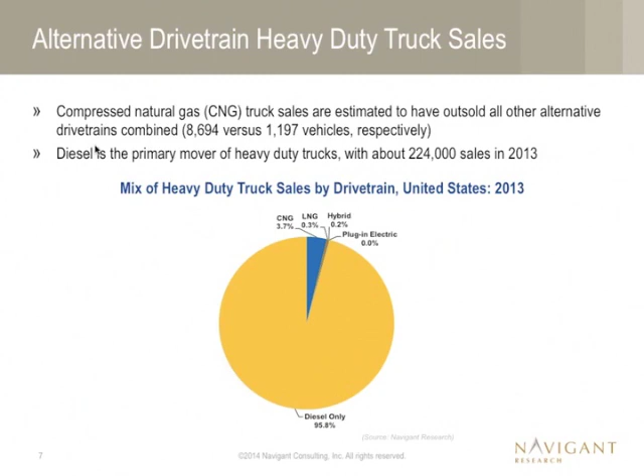But we are seeing a lot of movement within the alternative drivetrains as well. So as we look at where these trends are, we are seeing CNGs as being the big segment still. We're anticipating that's going to triple by 2022, growing to almost 27,000 annual sales in the heavy duty market. Liquefied natural gas, we hear a lot about that as well. There are some challenges within that market, but we are seeing strong growth. We're anticipating that to hit 7,163.

Hybrids and plug-in trucks are anticipated to grow rapidly, but they're still a very small part of the market. What we have seen in the last couple years is that natural gas has really stolen the thunder from the hybrid market. The hybrid market grew rapidly a couple years ago, and then it sort of stalled. We see that as still somewhat the case within heavy duty. Within heavy duty, things like compressed natural gas and liquid natural gas are really going to become more the mainstay. But that said, we are going to see a number of hybrids and plug-ins.

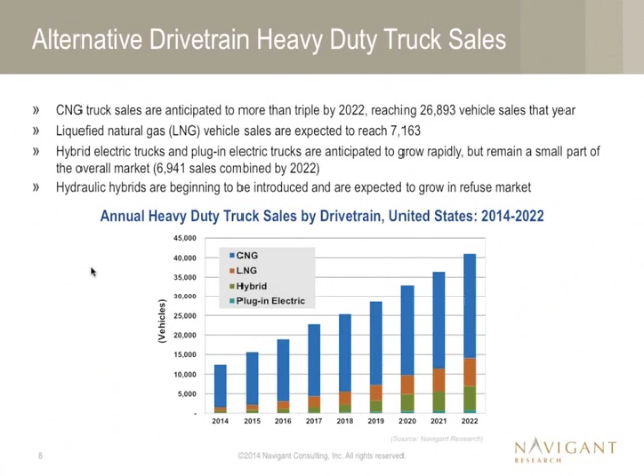Finally, what isn't actually in this chart is the hydraulic hybrids, and I wanted to mention that because we are seeing a lot of interest in the refuse market as well as the transit market. In the refuse market, we do see the hydraulic hybrids, and right now we see that about 17 hydraulic hybrids were added in 2013. Two of those were actually CNG and hydraulic hybrids. We're seeing a lot of interest in understanding how CNG can be combined with some of these other technologies, and it looks like hydraulic hybrid may be one of the areas that drives the combination of those technologies. So trying to understand why natural gas has taken the spotlight, one of the big issues really comes back to cost.

Now, CNG prices. There's a couple of things that make this a little bit complicated. First of all, as we're hearing right now, natural gas prices, the Henry Hub spot prices for natural gas, are actually very high. We have not seen that translated into the CNG price. One of the reasons for that is because natural gas does not make up the majority of the cost of CNG. The cost of CNG is being driven by electricity costs and taxes and profits, those sorts of things.

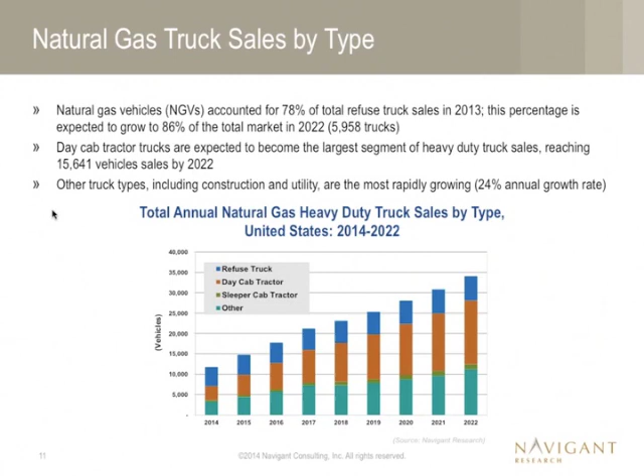So in terms of our forecast for natural gas, one of the key issues you have to look at is the infrastructure side of things. Within the refuse market, it really varies quite a bit whether it's a private station dedicated to that individual refuse fleet or if they're using public infrastructure. It can vary depending on the size of the market, the specific layout of the routes, and those sorts of things. So if there's a contract for a certain number of trucks to service a given city, the individual refuse companies are making the assessment of whether it's worthwhile to install a private refueling station. Some are using mobile refueling, or they end up using public refueling to serve that particular market.

So where does all this leave us? Right now we're seeing roughly 1,300, almost 1,400 stations, and we're anticipating that 1,325 more will be added by 2022. Really, the focus of this is going to be the early part of this forecast—through 2017 we see fairly strong growth within infrastructure development. That will start to slow when you get to 2018 and later, in part because the main routes being served by natural gas at that point will already be developed. There's not going to be a big push to continue public infrastructure once you have the key fleets and key cross-country and intercity routes covered. We see the funding slowing quite a bit, though there will still be some development after that, just much slower.

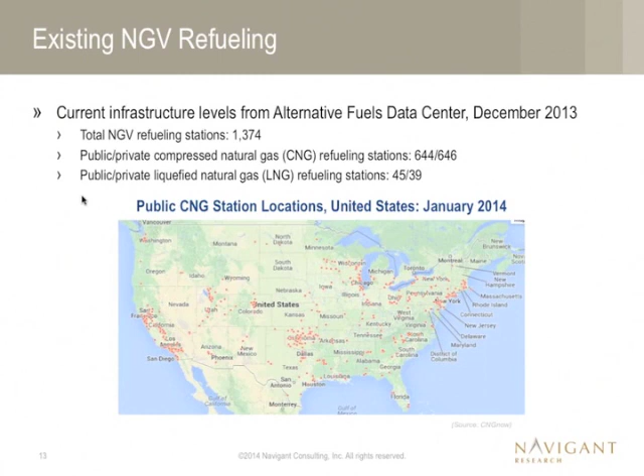So just a couple of summary slides here. The cost of the natural gas station remains a big hurdle, and we're seeing efforts to change that.

LNG is also still high, particularly for the kind of small scale that it is, so we've seen slower rollout of infrastructure for that. And then finally, there's a lot of merger and acquisition activity within the natural gas industry still. While refuse may be somewhat shielded from that, there are still big questions on how overall that is going to impact the industry.

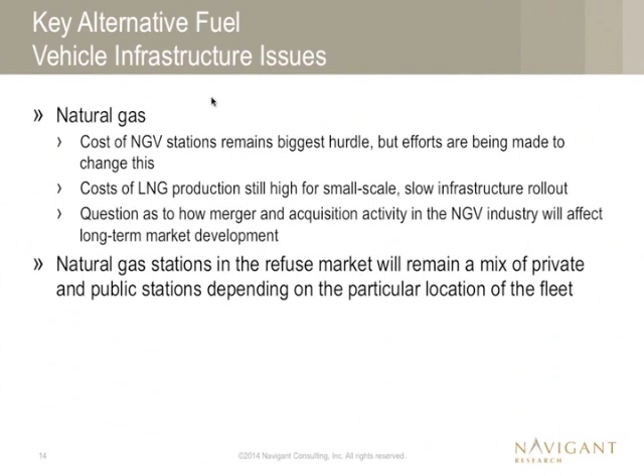And then the refuse market, as I mentioned before, is going to remain this mix of private and public station. It's really going to depend on the location of a particular fleet.

One of the keys right now that we're seeing within the natural gas market overall is that smaller fleets are becoming a much more important factor for growing the sector overall. So a lot of fleets, while the focus has been early on to get to the bigger fleets, 100 to thousands of trucks, now we're seeing an increased focus on the smaller fleets of 5 to 50 trucks.

Specific vocations are really driving this, whether it's vocational trucks like refuse, construction, utilities, cargo, transit, logistics - those sorts of things are becoming increasingly important.

Return-to-base fleets have traditionally been the key bread and butter for natural gas, but we are seeing the longer distance, point-to-point, becoming increasingly important.

That matters because you're seeing the infrastructure develop to support that. So you are starting to see more truck stops on the freeways and those sorts of things that are increasingly serving either natural gas, compressed natural gas, or LNG.

And beyond that, the market for natural gas vehicles really remains fleet focused. We think that's going to remain the case. We don't see a big consumer market.

And then finally, the key to all of this really is the price differential between gasoline and diesel and the alternative fuel.

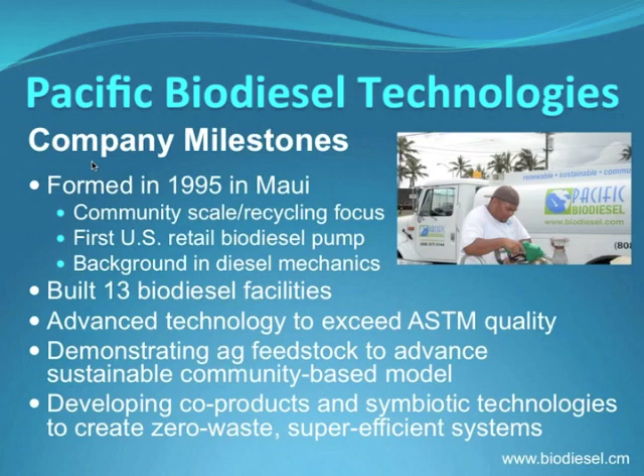So why are a lot of the folks here concerned with refuse fleets and community fleets, and why are you in this conversation? I think the reason is that as a world, we're trying to deal with greenhouse gas emissions. We're trying to talk about local emissions in cities as far as smog and health issues, as well as this problem of importation of petroleum, which exports our cash. Significant issues around the whole economic model.

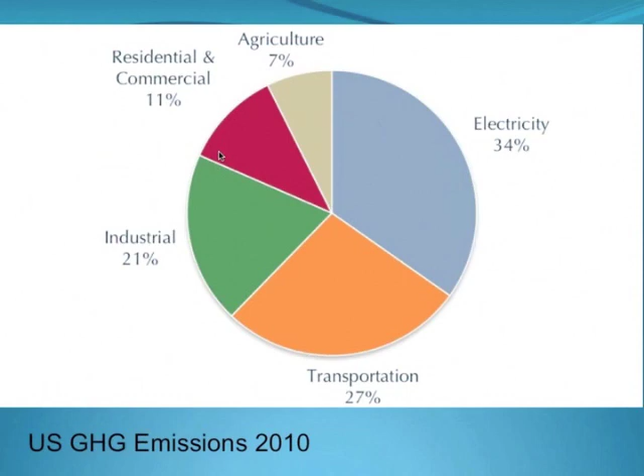So transportation is a piece of it, and it's kind of a big piece. When you look at the total amount of greenhouse gas emissions, this is from 2010, transportation was a significant chunk of that at 27%. Next slide.

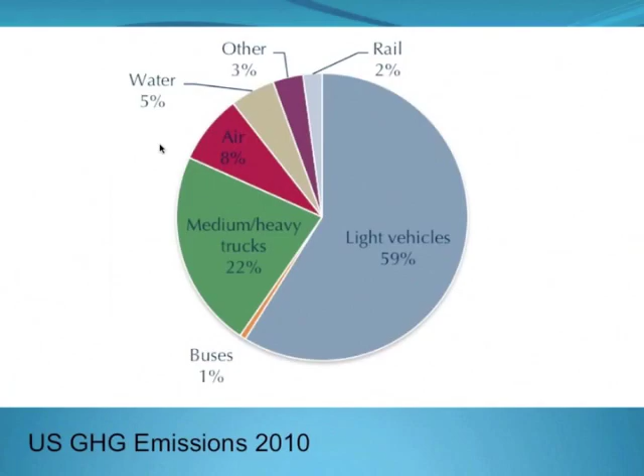So what we're doing is making an alternative fuel for diesel engines, which is biodiesel, and I'll briefly go over what it is. Most everybody's heard of it by now, but it's a fuel for any diesel engine. We've changed the vegetable oil to fit the engine, so you don't have to fit the engines to the vegetable oil. It's non-toxic, biodegradable, non-flammable.

It's ultra low sulfur, always was. And in the case of what we do, it's recycled, but if you make it out of crops, it's still renewable. A little different from CNG, where thank goodness it's domestic, but it's not renewable, it's still a fossil fuel. It's excellent lubrication for engines, and we've got some good standards.

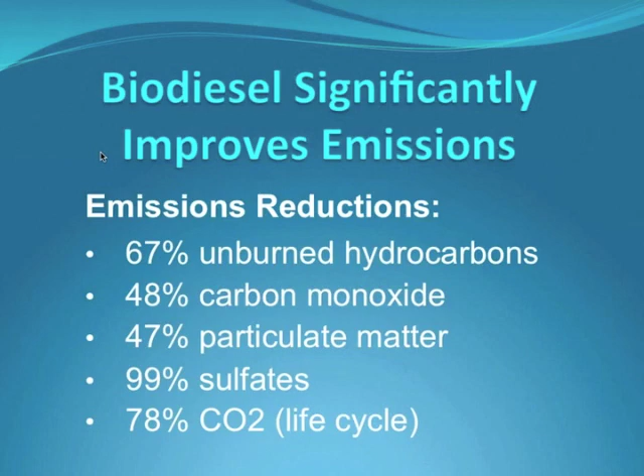So just changing from diesel to biodiesel will make a significant emission impact. You can see the amounts of different products that we're reducing, so it's a quick and significant way to reduce those tailpipe emissions. Next slide.

But there's a lot of other values to biodiesel. Again, where petroleum is a foreign source, biodiesel is local, or can be local and should be local to the US. Petroleum is toxic as a liquid, which means that if you spill it on the ground or in the water as you're fueling, you've got a problem.

Biodiesel is non-toxic, so it rapidly degrades. In the case of a ground contaminant, with petroleum you've got to dig it up. With biodiesel, it's biodegradable per EPA rules, so you need to keep it from running off your property, but it's not required to clean it up if you do spill some. It will naturally degrade.

Some people like biodiesel because it's non-flammable. It's combustible, but it's not flammable, which is interesting when you're trying to run an engine. But the flash point is very high, and I always claim you can put out a fire with biodiesel instead of starting one.

And the price of petroleum, as we all know, fluctuates, where biodiesel can be very stable. As I talked about with the money, this is a big one for most communities, and certainly in Hawaii we look at this a lot. 85% of the revenue, or 85 cents out of every dollar you spend on petroleum, is exported out of your area, usually out of the country, in the case of liquid petroleum. With biodiesel, only about 15% or 15 cents out of every dollar you spend leaves your community, assuming you're making your biodiesel locally in the sustainable model.

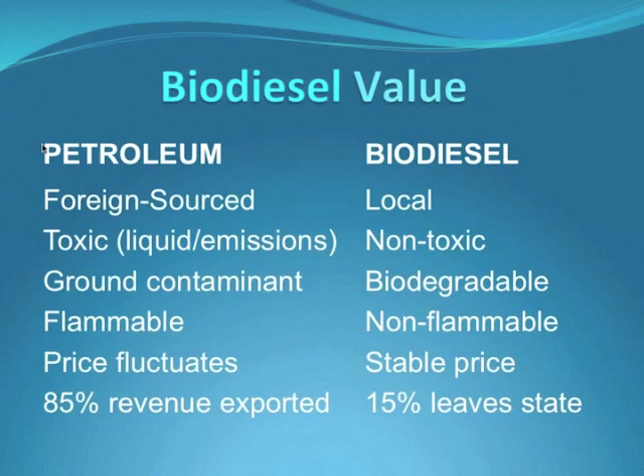So again, there's lots of benefits for the community that fleet owners can cause to happen by running with biodiesel. It's a cleaner environment. You can get jobs and businesses into your community, and it will build energy security because it's a very diversified source of energy. In the case of agriculture, it brings in diversified agriculture, giving farmers options on what they can grow and where they can make their money.

So I talked about the different plants that we've built over the years. We built plants all across the U.S., from Alaska to Texas, Maryland and Pennsylvania to California and Oregon, and one in Japan. But this is the latest state of the art right here. This is actually where I'm at today, the Big Island biodiesel plant.

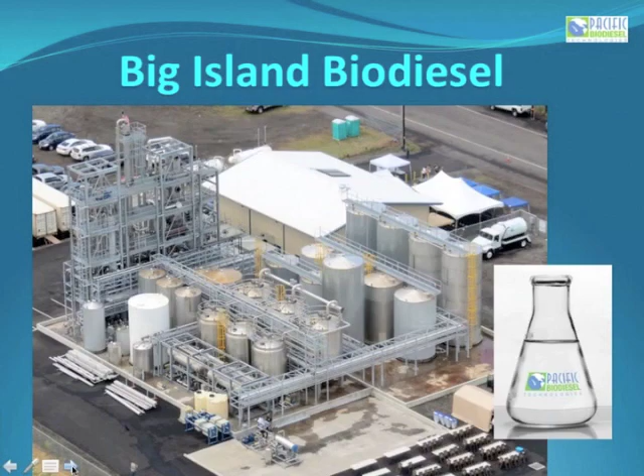This is a little bit unique because now we're processing trap grease, brown grease, and cooking oil, as well as agriculture oils, into biodiesel. You can see on the vial and the flask in the corner there, the fuel that comes out of this particular plant is clear. It's distilled biodiesel, so we've distilled the final product to remove any trace impurities. This is what we need to do to run those trap greases. So we take the worst material that we have to deal with, and a lot of the refuse fleets know how difficult the FOG is to deal with, and we make it into the best fuel. This fuel from the Big Island plant is among the highest quality biodiesel in the world, again using that trap grease as a feedstock.

So we run a laboratory analysis of this fuel, and it's spectacular.

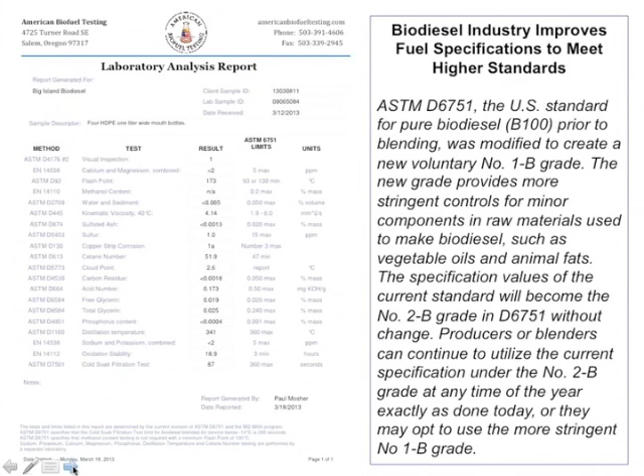The reason we need to do this is that the engines are changing, and as the engines change, the OEMs have said, you know what we'd really like in biodiesel is this. So you can see these are the modifications to the ASTM 6751 spec. The first one came out in 2002. And if some of you remember, we started in 1995, so we didn't even have a specification for the product we were making when we started in business. But thank goodness we've got a spec now. As the engine technologies have changed and we've learned more about the fuel, we've continued to modify this spec.

If you think of the engines back in the 80s not being like the engines today, it's the same for biodiesel. The biodiesel we made back in '95 and '96 is not the same as the biodiesel we make today. The product is getting much better, much more stable. We're pulling out more impurities, and so some of those early issues we dealt with are just non-existent today because of the fuel quality.

And what that's done is, because of the increase in fuel quality and also the comfort of the engine manufacturers, a lot of them are getting more and more supportive of biodiesel. So basically everybody has to support B5 because it's in most of the diesel around the country. It doesn't have to be listed, but it can be a component of the diesel. So B5 in the US, B7 in Europe - most of the fuel in Europe is 7% biodiesel. So it's pretty transparent there.

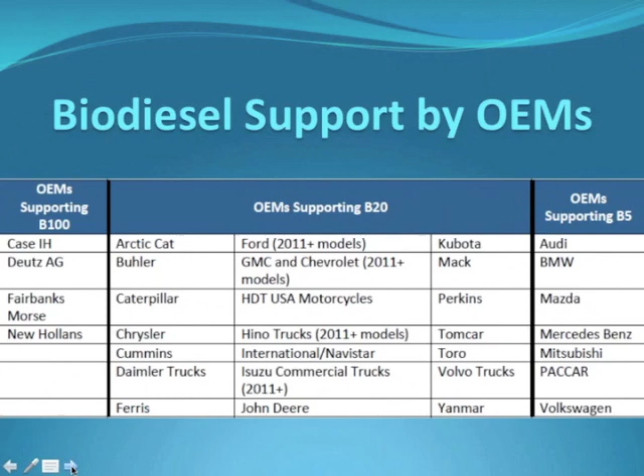So one of the issues we've looked at with the latest technology engines is what about the DPFs, diesel particulate filters, and SCR systems that are coming out on the newest engines. These take the diesel exhaust fluid, and it turns out they run really nice on B20. So we've got good results.

NREL has checked these systems. The performance of these systems was not affected by the use of biodiesel, and durability was also not affected. What we've seen in the field is that the SCR engines are just much more robust than the generation before. They're running really strong and are applicable to biodiesel. Again, they need very clean fuel, and that's why we want the distilled fuel, as quality demands get higher and higher, we're going to be there with the right fuel.

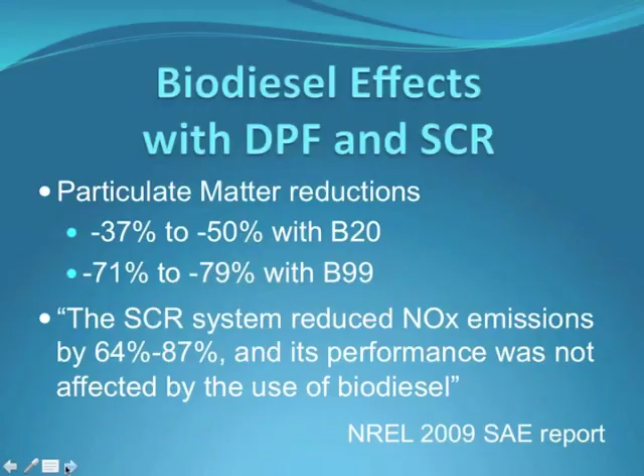So one of the things that happens with manufacturers, or with dealers especially, is they tell you that if you use biodiesel in the engine, the warranty is void. Again, a lot of this comes back to emission testing, not the actual durability of the engine. So when it really comes down to it, you have to look at what they can really say about the warranty.

Here's the biodiesel handling and use guide from NREL, from the Department of Energy. In this guide, it has a statement in chapter 6. It says federal law prohibits the voiding of a warranty just because biodiesel is used. It has to be the cause of the failure.

So what it comes down to is, if you're using good quality fuel and taking care of your system, you won't have a problem with biodiesel. They cannot void the warranty on the engine because of this, unless they prove that biodiesel causes the problem. Being a diesel mechanic, I'm always looking for what actually was caused by biodiesel, and I'm very comfortable with all the new technology engines. I'd like to go through some of those with you here too.

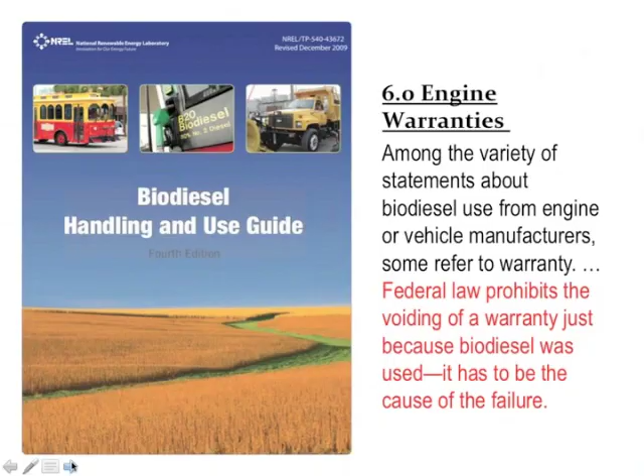System-wide, they've been running it, and they're very comfortable with the product. All varieties of engines, all years and types, including construction equipment. We also run it in large diesel engines for Maui Electric, and we run the Arizona Memorial shuttle boats on B20. There are stations all around the island that do more retail.

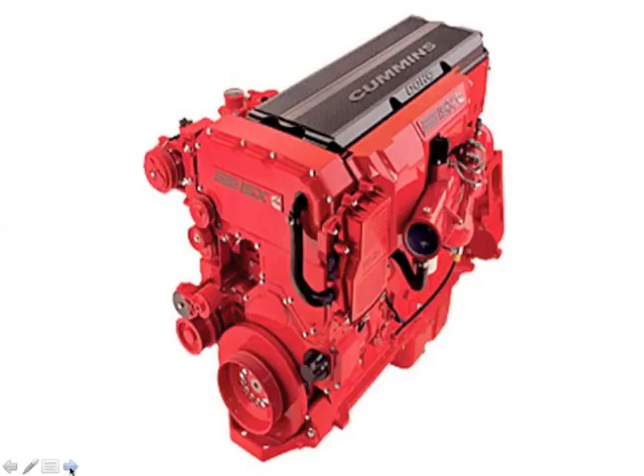And the heavy duty engines, this is the ISX Cummins. Our company has probably half a dozen of the 2011 and '12 vintage ISX running on 100% biodiesel, and many other fleets are running this engine at the B20 level. No problems, it runs fine. Actually, we've got engines covered by PacLease, bumper-to-bumper warranty, where B100 is acceptable. They don't have an issue.

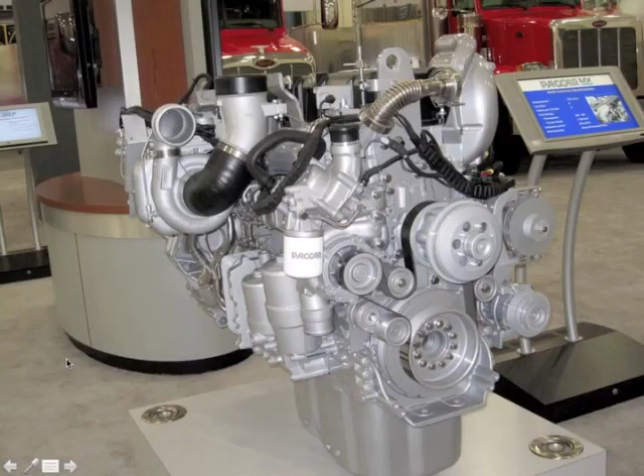And this is the PACCAR MX. Again, we've got these running on 100% biodiesel, and we're actually doing a test right now for PACCAR, an extended service test on 2012 models at B20. There's nothing to do except fill them up. We haven't had any issue with any hose, seal, anything to do with this engine, and they're very efficient engines right now.

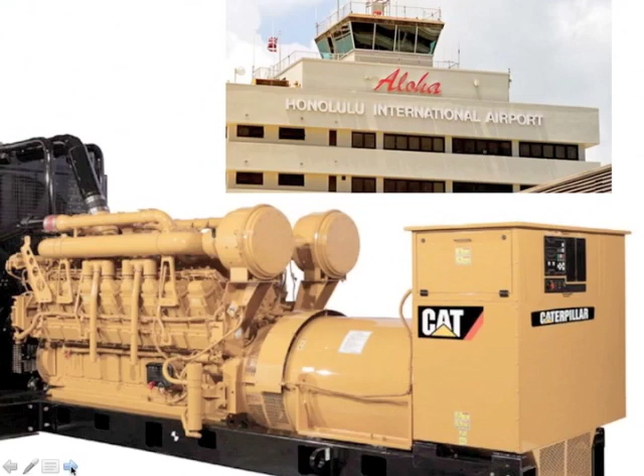Here's a Caterpillar that's going into the Honolulu airport as prime power and backup. There are 4 of these new engines, and Caterpillar is going to warranty them all on B100 - that's the only fuel that's going to run in these generators, 100% biodiesel, and we have the contract to supply the fuel for this.

I want to finish up by talking for a few minutes about the Sustainable Biodiesel Alliance. We saw early on in the industry that there could be some issues with biodiesel as well, by not making it correctly.

This was formed by different entities - us, Willie Nelson and his wife, Woody Harrelson and his wife, Daryl Hannah, and a few other people - just looking at how to do biodiesel to maximize the really nice gains you can get from this product. It's a 501c3, developing standards and practices for the industry, and the mission is to protect local community-based biodiesel production. We've looked at cases of burning down the rainforest to make biodiesel oil plantations, and this just wasn't what we all got into this business for.